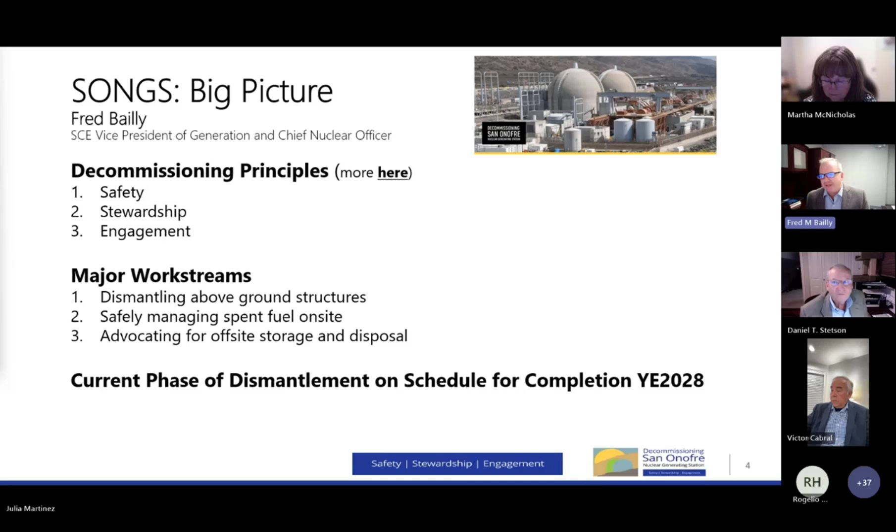In a moment, we're going to do community updates, but I'd first like to recognize and thank our CEP members. Next slide, please.

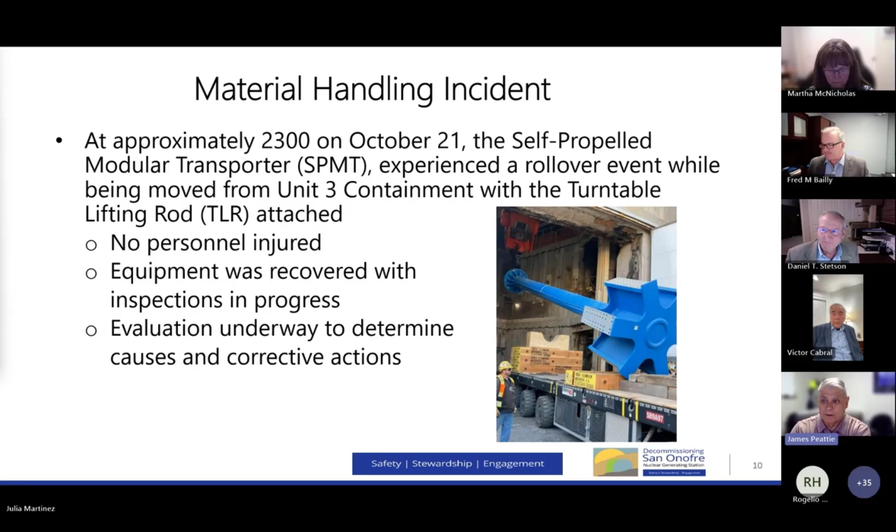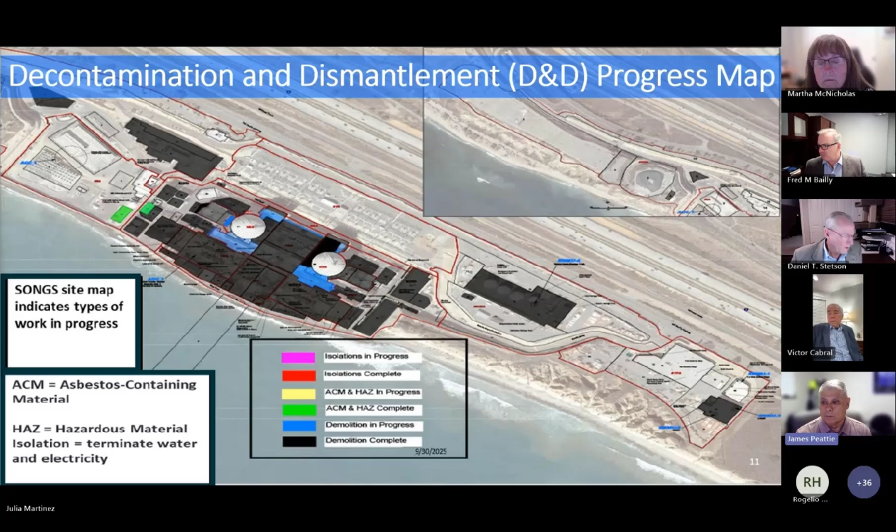What's left are the two round containment domes, and way at the right-hand side is what we call our South Yard facility. There are some above ground support buildings that will be demolished - they are not part of the actual power plant, but they do still need to be demolished. Okay, next slide.

Again, this is our general overview of the schedule.

Really, in 2025, it was focused on RV segmentation, the auxiliary building demolition or controlled building demolition, and large components, which you don't actually see on there, but that large components work is essentially wrapped up.

RV segmentation, Unit 3 is near completion. It'll go into 2026. Probably late first quarter, middle of second quarter of 2026, RV segmentation will finish on Unit 2. Building demolition, those large blue areas, should wrap up early in 2026.

And then we'll move shortly right into Unit 3 interior demolition of the containment buildings. So as Fred stated, by the end of 27, the containment structures right now on schedule are scheduled to come down. The domes will start to disappear. You can see that externally from the highway, but those will come down in 2027, if not late 2026.

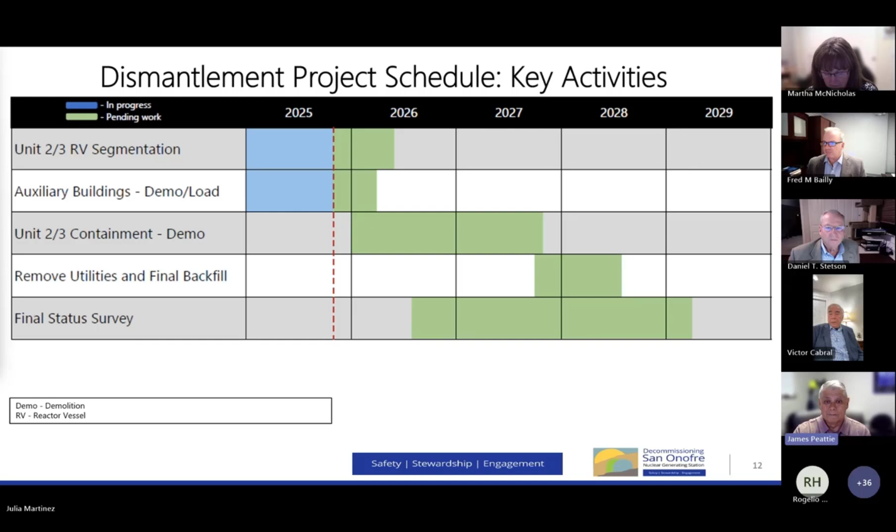Okay, next slide. And decommissioning activities, so I talked to this a little bit. Large components, that was really focused on steam generators, large pumps. All of those items have been removed from containments.

The only thing we're still tracking on there are the removal of the spent fuel transfer tubes. I do have some photos there, and those activities have started. So I'll just wait till I get the photos.

We'll talk about those. RV vessel segmentation, Unit 3 is nearing completion. Right now, what's left is the very bottom of the reactor vessel. It's called the bowl. That needs to be cut, segmented, packaged, and removed from containment, and that should wrap up segmentation on Unit 3. Unit 2 setup is in progress now, so the equipment needed for the future vessel cutting is being set up and put in place now.

And then controlled building demolition, good progress there. Most of those buildings will come down here soon, and there's a new structure being built, with some photos in there talking about that. It's the first of 2 decommissioning isolation enclosures.

And what these are, they're very large tents. They're built outside and connected to each of the containments. The idea being that all the material inside a containment, as it becomes demolished and removed from the inside of containment, will stay inside of this tent structure. It'll get segregated, and then that material gets loaded into rail cars, which can enter and exit the containment. So it's very similar to the material handling facility tent at the opposite end of the plant.

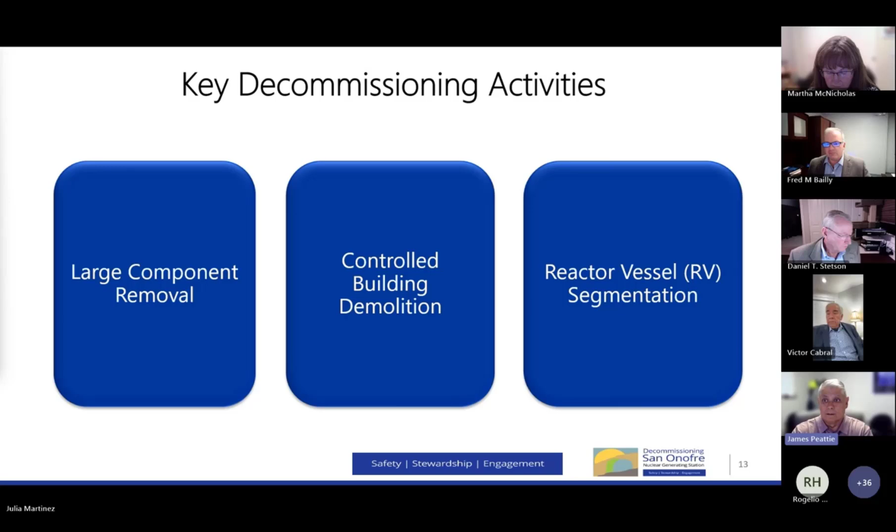They use a wire saw. It's filled with concrete and grout to make it solid. The wire saw cuts through it, and then essentially we have a large concrete-filled piece of pipe. That piece is then removed, separated into smaller segments, 3 that get loaded into rail cars, gondolas, and then shipped off as solid waste.

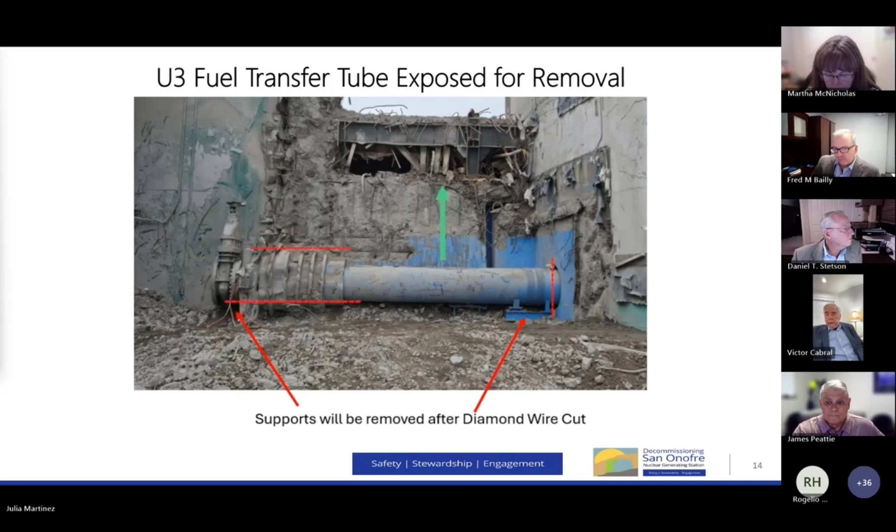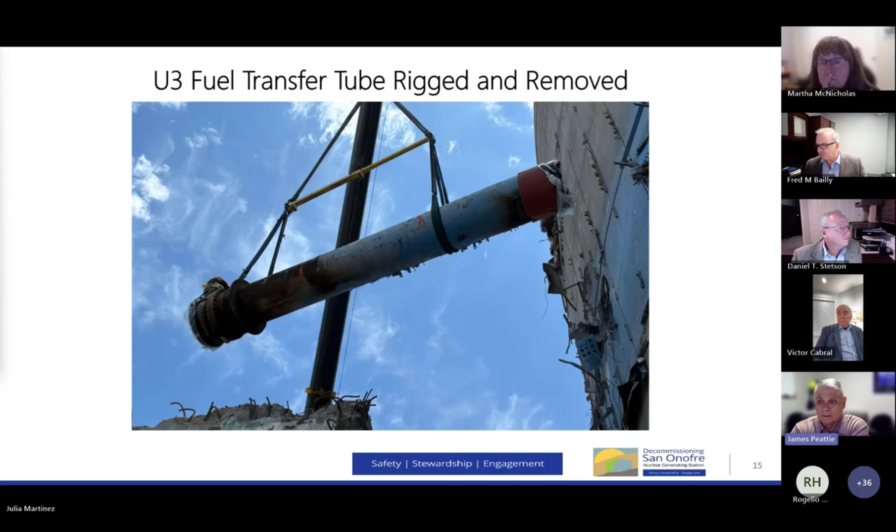And this also includes the removal of another auxiliary building next to it, right up against the containment, and then underground piping that was used to feed the auxiliary building. So all of that's been removed. Good progress going on there. The Unit 3 tank farm was removed last year.

So Jim, real briefly, when you're referring to the tank farm, those are what we think of as the areas where the rods were cooled after they were in the reactor. Is that correct? No, a tank farm is just water storage tanks.

Oh, okay. Some of the water storage tanks are refueling water storage. So that would be water you use during reactor refueling activities. You need to move it out of the cavity and store it, and then use it again next time. So there were several of those, and several tanks considered condensate storage tanks. So if you needed to use or make up condensate, you already had the tanks full of water, so they could be used at any time, including in an emergency. Okay, thank you.

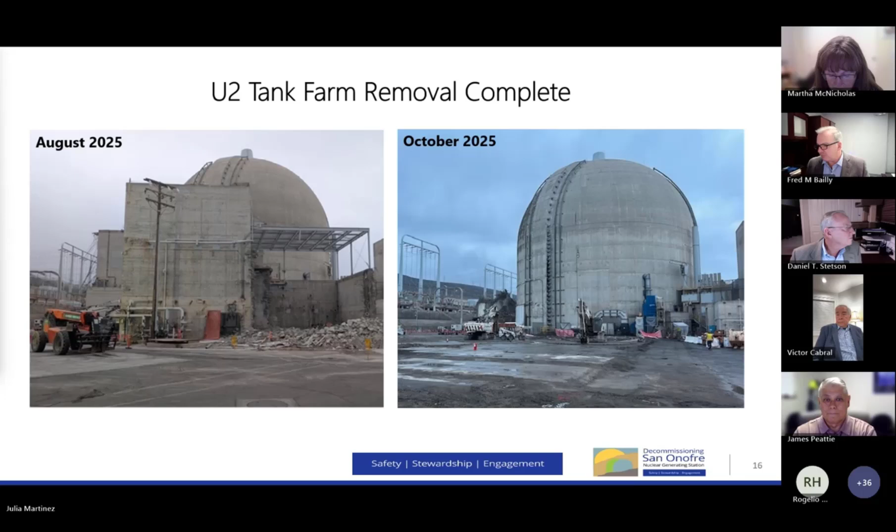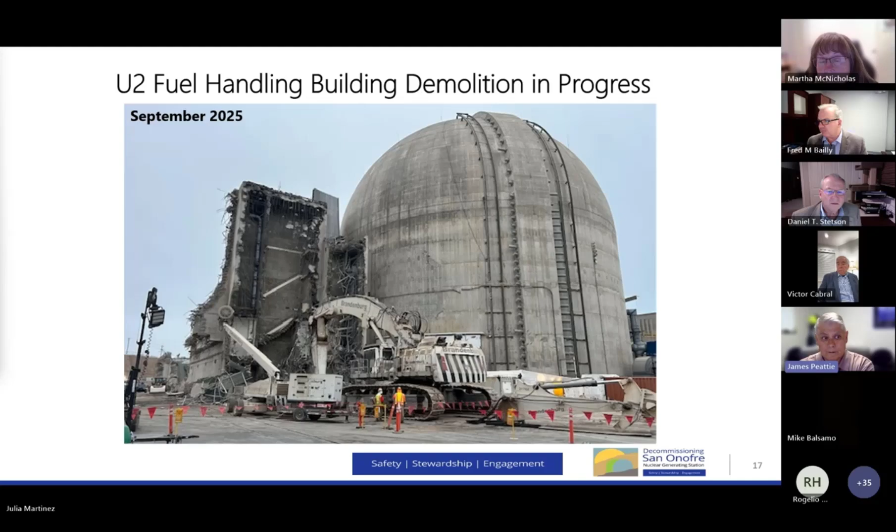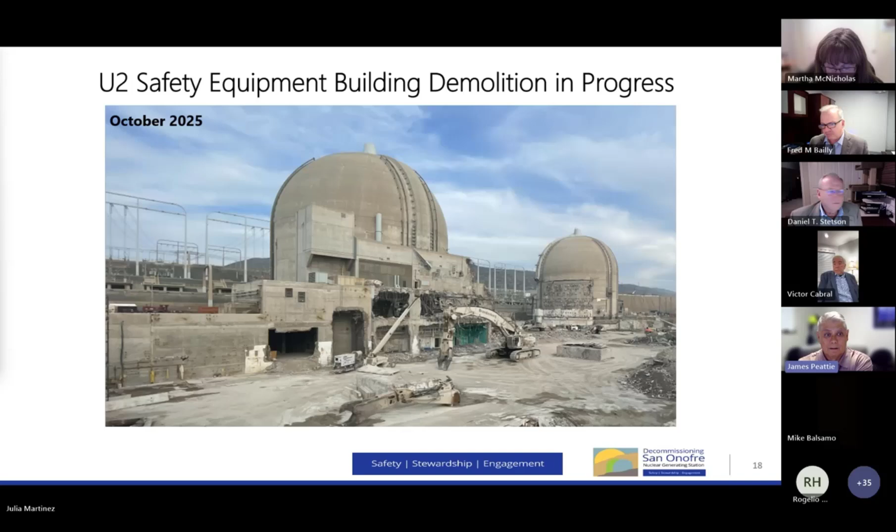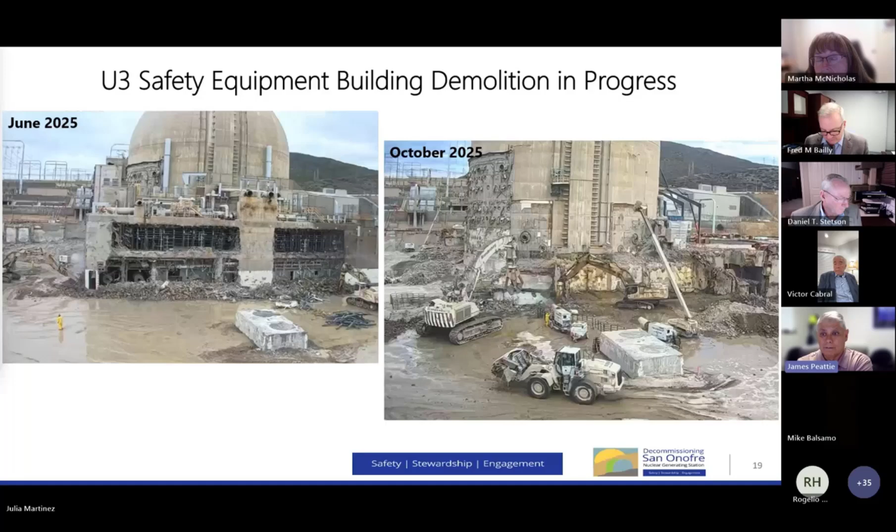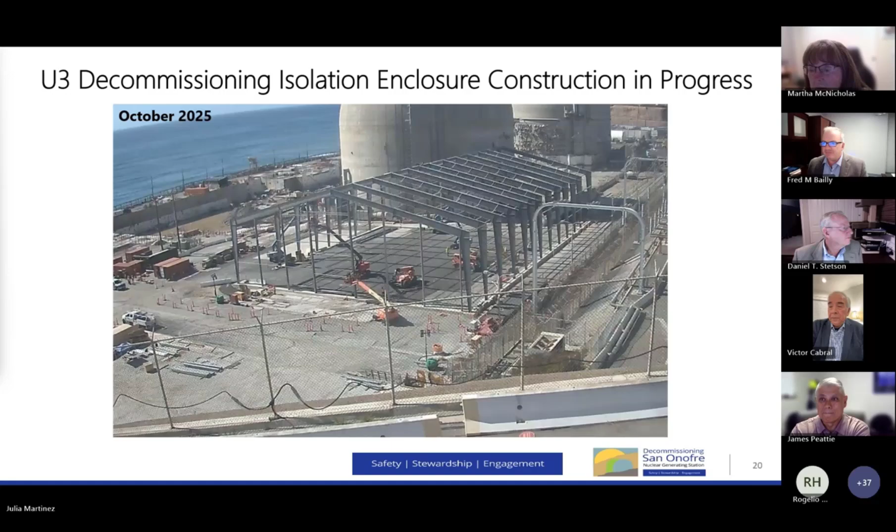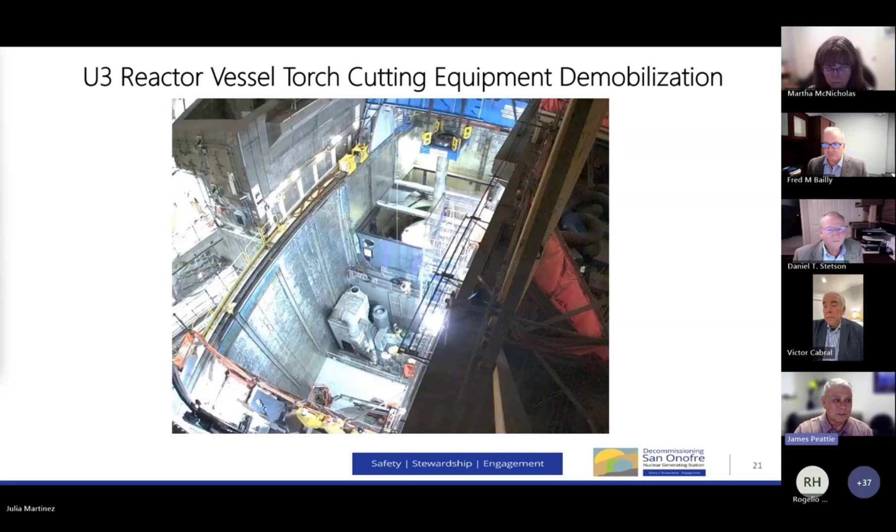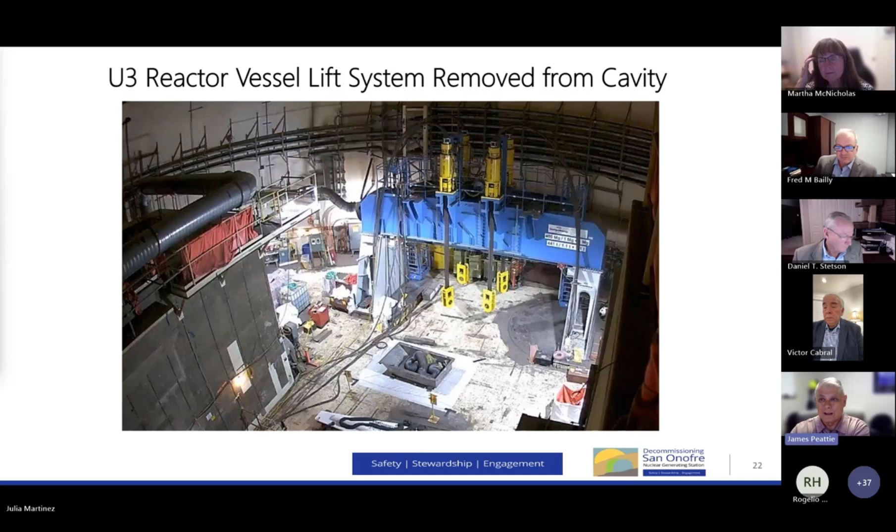The reactor lift system, so this is where it gets connected. It's disconnected, now removed over the top of the cavity. Then go to the next slide.

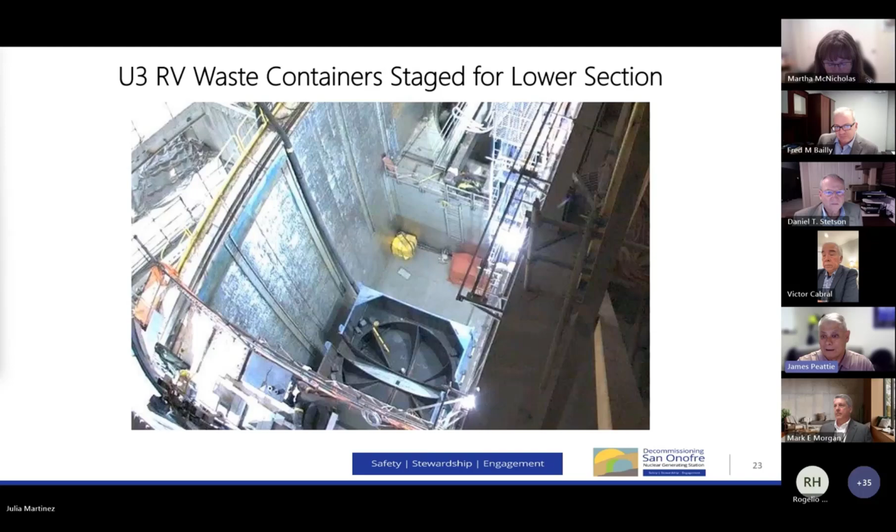There's 2 boxes in the lower cavity - these are the waste packaging boxes. There's one here and one here. That lower bowl vessel will then be picked up and placed down into the middle of this box. They will saw cut that vessel so it fits into each of the boxes. They'll close the sides and top of the boxes, and this box becomes the shipping container that goes out on a rail car. So each one of these will get removed from containment, placed on a rail car, secured, and sent to Clive.

So this is the turnable lifting rod. It's lowering the bowl pieces down into those 2 boxes. That part's complete. This lifting rod was then no longer needed in Unit 3, so when they took it out of here, they went down to the hatch to offload it. So this is when this occurred.

What's in those 2 boxes now is the lower bowl, which is actively being wire saw cut as we speak. Probably another week plus before we finish that activity, and then several weeks to get everything packaged up and that waste removed from containment.

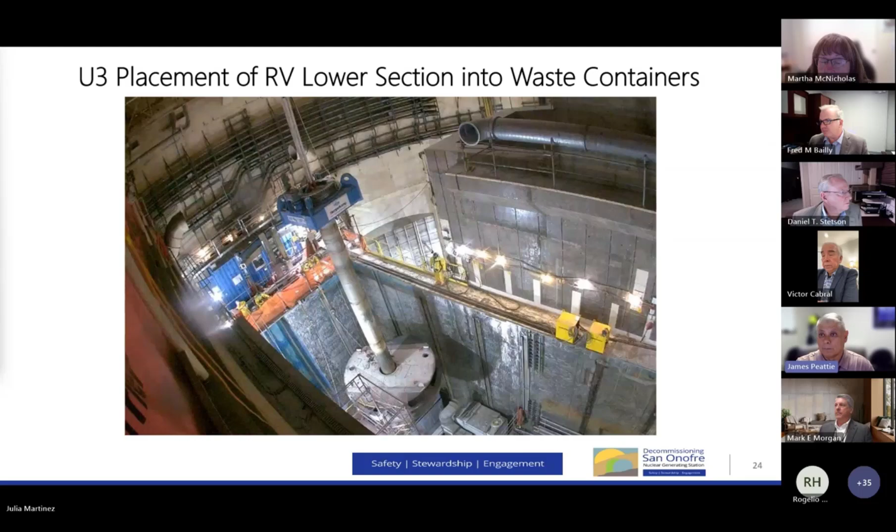Next slide - equipment demob. You can kind of see the vessel there in the lower picture. On the left-hand side, it's in the boxes now. And this is what a reactor vessel cavity looks like with no reactor vessel in it. So they're basically removing all the equipment from Unit 3 and moving it to Unit 2.

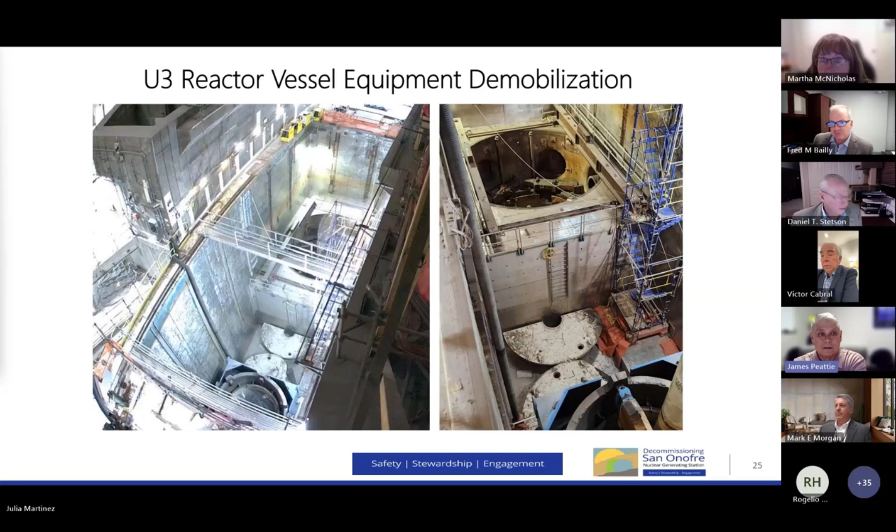Next slide - activities in Unit 2 look a lot the same, they're just going the other direction. So this is now installation activities. They're building on the left-hand side what they call the shield enclosure. This enclosure goes around the vessel and is designed to keep the flame cutting system contained. The ventilation system on the right pulls ventilation during flame cutting so you can exhaust all that heat and smoke from the building and maintain safety in the building.

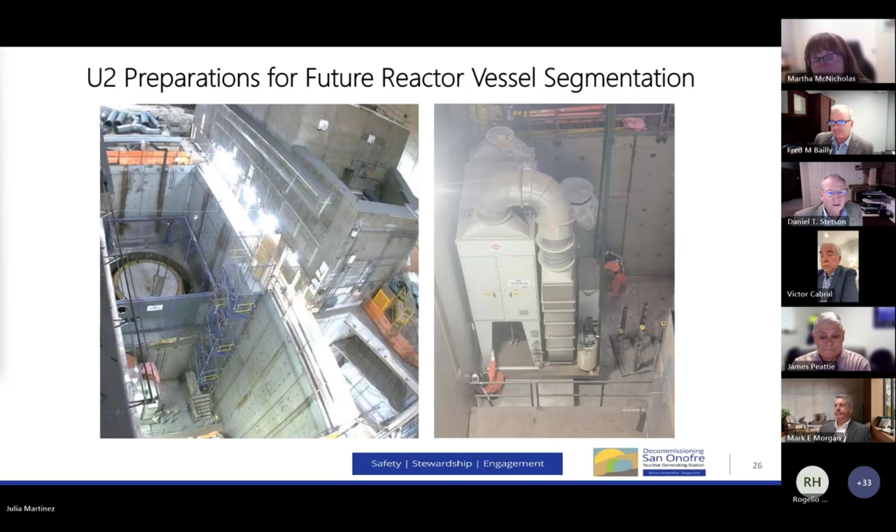And I think that's the last of my pictures. Yep, that's it. So if there's any questions, I'd be happy to answer them. If not, I can wait till I hear some later.

Thank you, Jim. Thank you. Those photos are truly amazing when you think about everything that's going on, all the demolition. So I want to look and see if there's any questions from any of our CEP members.

Victor, did you have a question? No, I'm fine. I asked mine already. Okay, Martha, how about you? I just wanted to say thank you.

I love the demolition pictures. If I saw it in video, I'd like it even more. But you're right, it truly is amazing how this changes just from August to October. So thank you. Thank you.

Yeah, and we do have lots of pictures, Martha. We tend to try to just pick the ones that tell the story, but every day we take photographs of the work just to capture it for our archives and history later. Okay, thank you. I'm sure she'd like to see all of those.

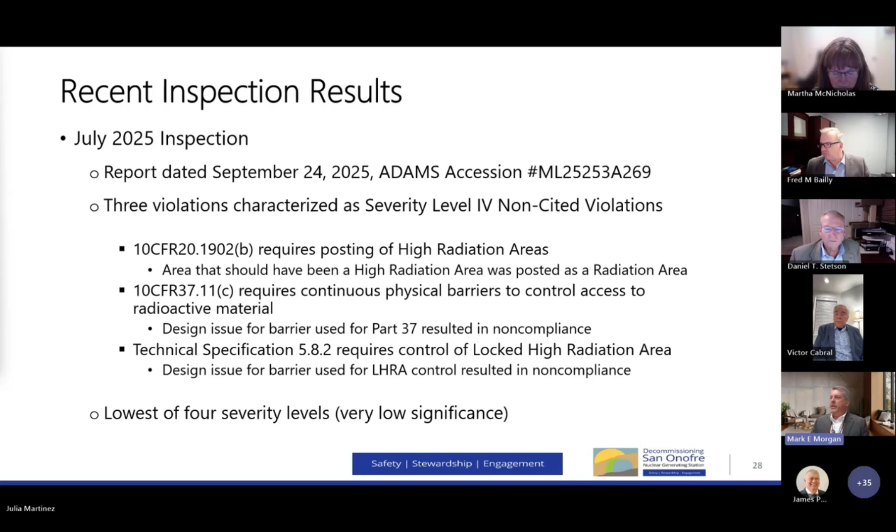So I'll walk through each of the 3 violations now. Can we go to the next slide?

So what's happening is you have radioactive material that's being brought out of the tank into the vault area and stored in some waste drums. You can see those on the diagram as well. Ultimately those drums either get emptied or removed in preparation for shipment offsite to an ultimate disposal site. So you have changing conditions.

You have waste coming out of the tank, into the drums, out of the drums, into other areas of the plant. At one point, the drums were emptied and the radiation protection group performed a survey and downposted the area between the tank and the vault, turning it from a high radiation area into a radiation area. That was appropriate for the conditions at the time.

But then what happened is when work started back up later on, additional waste was brought out of the tank and placed in the drums. There was a failure to recognize that conditions had changed again. There was not an appropriate survey that was done, and the area wasn't reposted as a high radiation area.

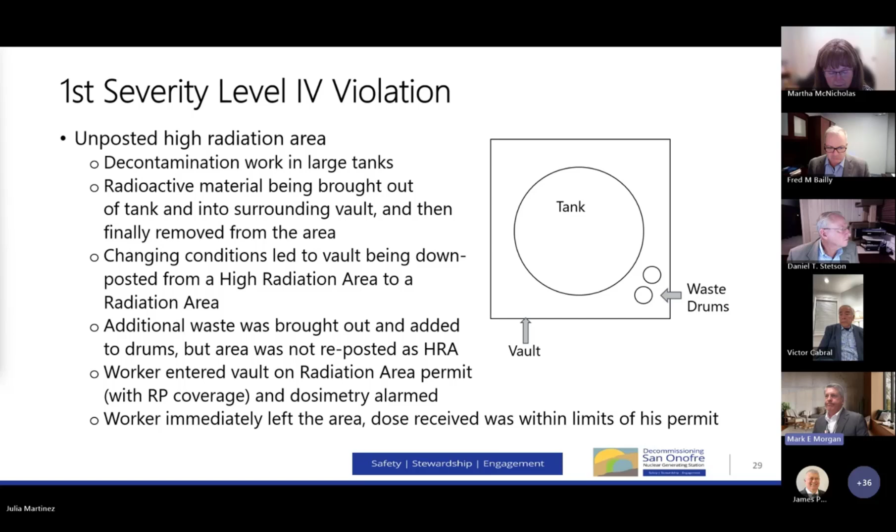But I do want to point out that the risk of unauthorized access was very low. In fact, it was actually zero, based on two things. One is the physical characteristics of the door, which again, I can't get into the details of it. And then by defense in depth of the program, there's really an electronic monitoring system on that door. We were able to review the logs for that system and determine that there was no unauthorized access to the Part 37 area.

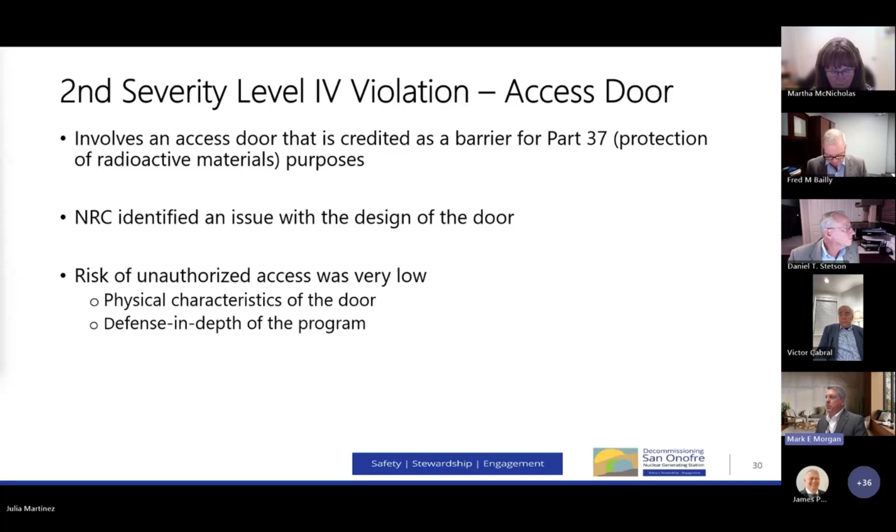And certainly we were able to inventory all the material that we were protecting and nothing is missing. So there was no theft or diversion. So again, the significance of this is going to be considered very low, and that's how it was issued by the NRC. Next slide.

Similar to the previous issue, the NRC identified an issue with the design of the door. Similar to the other door, it was alarmed. We were able to review the alarm logs and determine that there was no unauthorized entry.

So I think you can see that for all three of these issues, for the radiological issues, there was no overexposure of site personnel, and certainly no impact on the public. And for the Part 37 issue, again, there was no theft or diversion of material. So that's the basis for the significance again.

But as Fred mentioned, we take these issues very seriously, and as your regulatory compliance manager, we want to strive for absolute verbatim compliance. So we have entered all of these issues into our corrective action program. They have gone through the cause evaluation process. Corrective actions have been identified and implemented. The idea is that we want to stamp out these problems when they are small so that they don't grow into bigger problems down the line.

So that's the end of my presentation, unless there's any questions.

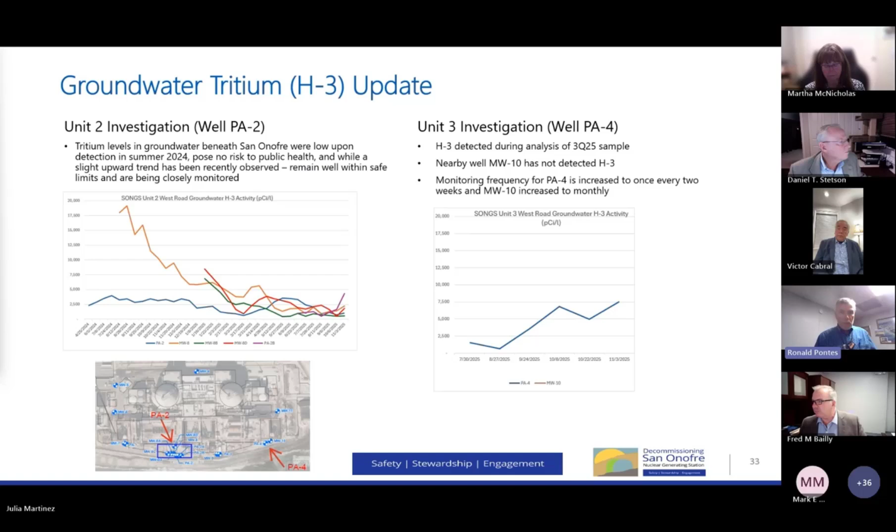It's really important to understand that the levels of tritium we're monitoring here are not a threat to human health or the environment. They're in fact very low, and we're not a drinking water site. The water underlying the SONGS site is brackish, and under the San Diego Basin Plan, it's not drinking water. But the levels are quite a bit below the 20,000 picocuries per liter limit set by the EPA. We measured all the tritium released from the area of the Unit 2 side across the site boundary, and calculated 0.008 curies were released. It's a very tiny fraction of what we released that year for monitored releases to the ocean, so the dose there was insignificant.

Finally, I want to raise awareness that tritium in groundwater below a decommissioning plant undergoing this deconstruction process is not unusual. We saw this in Unit 1, and there are some other plants with links if you care to look at them. Connecticut Yankee had problems, Yankee Rowe, Big Rock Point, La Crosse most recently. There are others, I didn't try to make a comprehensive list, but these are some I looked at, and you can plainly see they had similar problems. They monitored the tritium until it had dissipated or attenuated to a point below the drinking water standard and below NRC standards. Notably, most of these other sites had drinking water below their reactors, unlike what we have. So some information there if anybody's interested in looking it up.

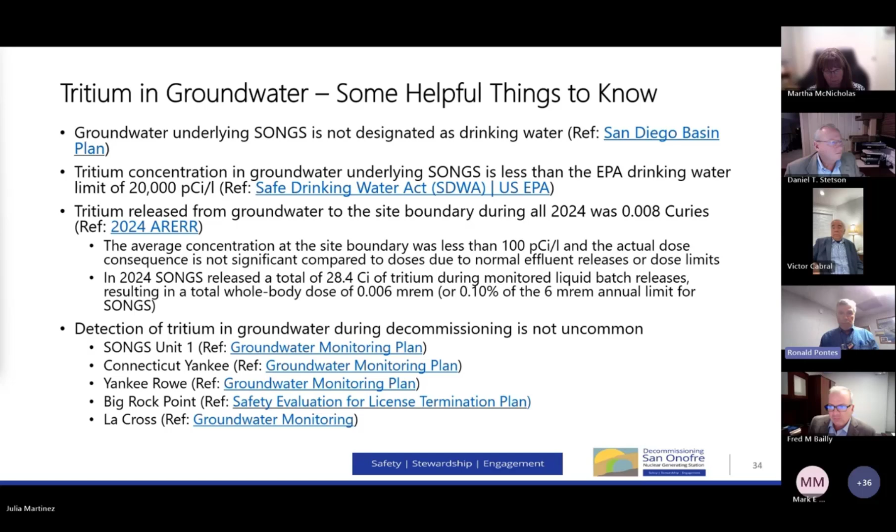All right, then let's go to the next slide.

We had the DTSC on site earlier this month to perform an audit of our hazardous waste storage facility. They do this annually, typically in November, and have been doing it for years and years. This particular visit, the inspector had a finding. She took note of some small holes that were drilled in the concrete floor of Section A of the hazardous waste facility, and she gave us a violation for that.

Now, so we took a look at the citation, or the audit finding, if you will. She did correctly note there were a number of half-inch diameter holes in the hazardous waste facility hazmat area, Section A, secondary containment, which is the concrete pad. The holes were installed by us in June of 2021 while we were performing radiological characterization of the hazardous waste facility. Just a little reminder on what radiological characterization is.

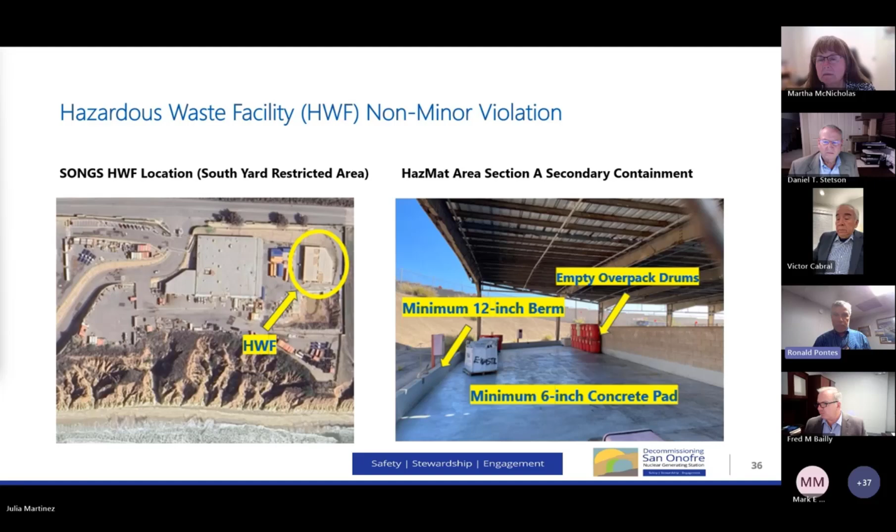We officially notified the DTSC project manager on November 5th, and we're on track to remedy the condition by today. I think it's all done, based on a report I just received a few minutes ago. We also informed the Nuclear Regulatory Commission.

Here's how things work, since we're licensed by the NRC to operate a commercial nuclear plant. By NRC regulations, if we have an interaction with a local or state agency, or even another federal agency, about an existing permit or license condition we may have violated, and we've received such a violation from those agencies, we have to tell the NRC about that occurrence. So we did that, on November 5th at 13:58 in the afternoon.

So what does the NRC do with that information? They take the information we provide into a report and post it on their website so that others can see it. That's the purpose of that report, so that information is pushed out for public awareness as well.

We are talking this over with the DTSC. We've been in touch with them. We are respectfully requesting the DTSC retract the finding. That's entirely up to the agency to decide, but we believe we are compliant with the permit. They have 65 days from the time of the audit to finalize their inspection report, though usually they finish much earlier than that. I'd anticipate over the next month and a half or so we'll probably see a report, but they do have up to 65 days. So that's where we stand on this issue.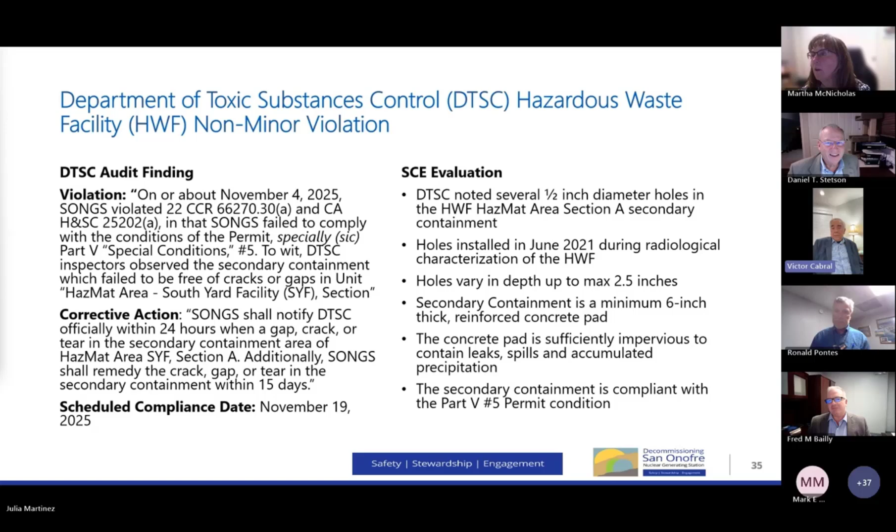Okay, all right, somehow I missed that. Thank you, sorry, I was talking a lot here, so maybe I was trying to follow but sometimes I don't. No, thank you, you're welcome. Martha, thank you, because I needed to understand that as well.

Victor, go ahead. I want to go back to the groundwater, and as I understand, we have a great understanding and measurement of what's leaking and how much. But I thought you suggested that we're trying to find the source, and that's not yet completed. Is that correct so far?

Yes, it's pretty difficult for us to identify exactly where the tritium's coming from. On the Unit 2 side, we suspect strongly it came from a condition in the Unit 2 main steam isolation valve trench, a feature between the containment building and the safety equipment building. We have some history on that component indicating it leaked, the concrete structure leaked to groundwater, and we know tritiated water was held up in that area. That's suspicious and, in our opinion, likely the source, but we can't say that with 100% confidence. On the Unit 3 side, Victor, we don't know.

I am a bit suspicious it might be related to work in the safety equipment building, since we recently opened up the Unit 3 safety equipment building and started demolishing and removing pumps from the lower parts of that building. As we remove the pumps, a lot of dust suppression water collects there, and that water becomes tritiated from the concrete. So that's a potential leak path as well. Just don't know at this point.